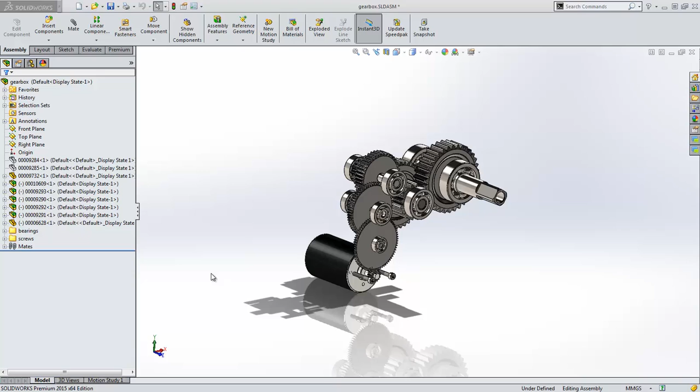The new View Selector gives you the ability to easily manipulate the view. Previews are also available, even if the view plane is obscured.

Hidden components can now be previewed from the Feature Manager without having to unhide unnecessarily.

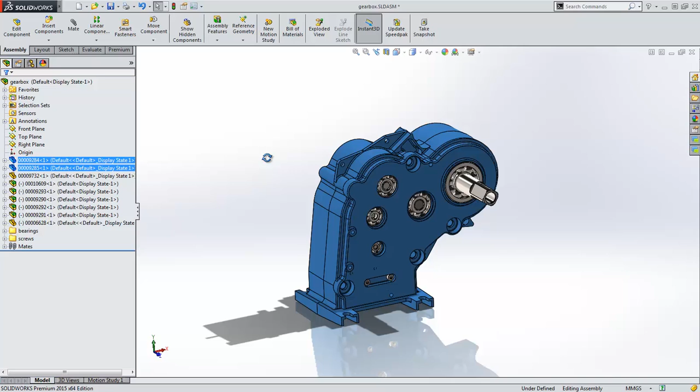Isolating components is also improved in SolidWorks 2015. You can now isolate a component whilst editing it, and also isolate components from a common mate. In this case, we will isolate these two cast components and create a display state.

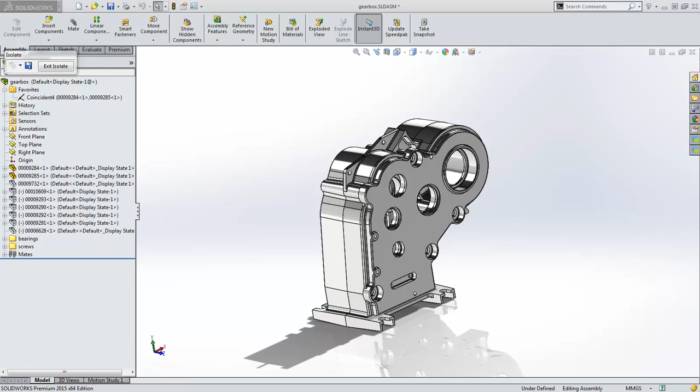In SolidWorks 2014, as new components were added to this assembly, they would, by default, be added to this display state. To preserve this display state, you can now choose the option to automatically exclude new components.

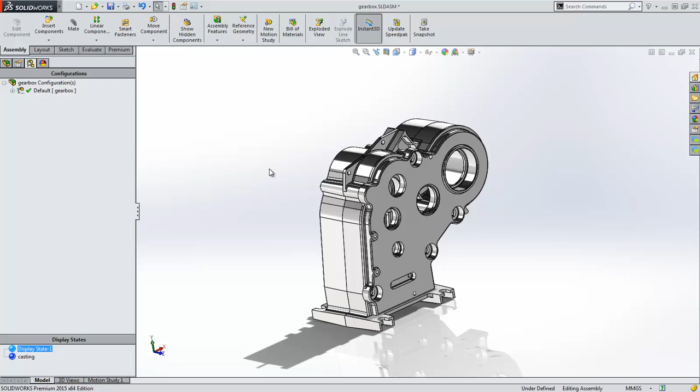At a component level, SolidWorks 2015 gives you the ability to track parent and child references using a great new graphical reference viewer. Embedded references, like sketches, are listed next to the reference arrow.

SolidWorks 2015 enhances the selection process in several ways. A new toolbar is available from the right mouse button and gives you the most commonly used commands. In this case, we will filter to faces and select some geometry.

Very often you may accidentally unselect before completing your task. We now have the ability to go back to that previous selection, saving us wasted time and effort.

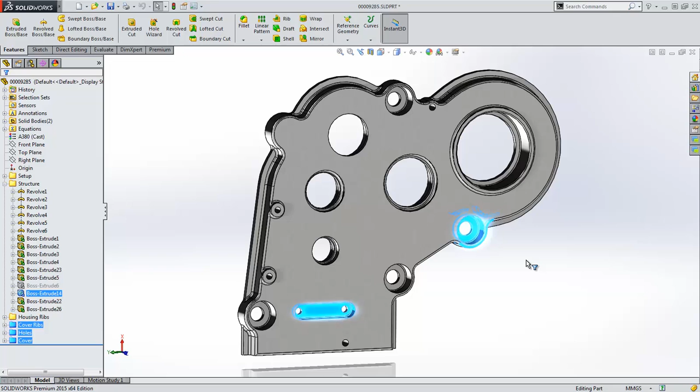Hard to pick entities like small surfaces are also much easier to deal with in SolidWorks 2015. Repeated small mouse movements now change the selection filter to faces, reducing the need to continually zoom in and out.

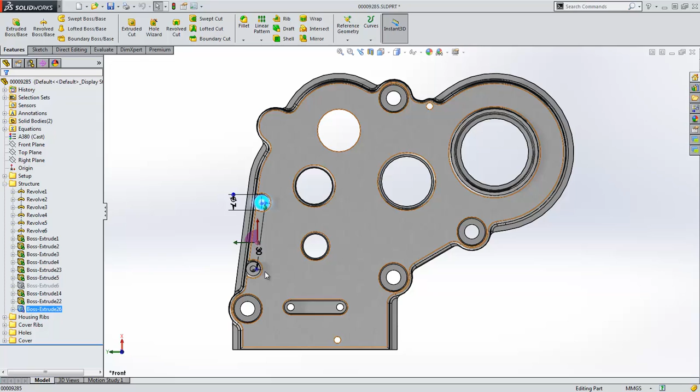Selection sets also allow you to store important geometry or components in a selection folder for later use in design or simulation.

You can now customize the fade-in toolbars in either the Feature Manager or the Graphics area. In this example, I will add a Hole Wizard command to the toolbar.

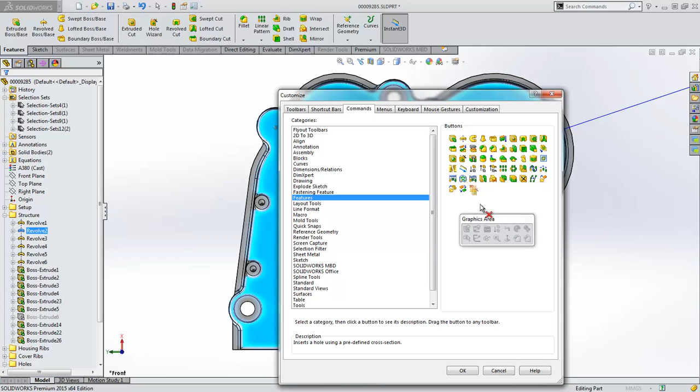I can now quickly select a face and place a standard hole very quickly and easily.

Finally, Toolbox is now improved to include the option to allow custom configuration names. We can also change the way that components are shown in the Feature Manager or reported in a bill of materials. Let's change this to show the file name in the Feature Manager and the configuration name in the bill of material.

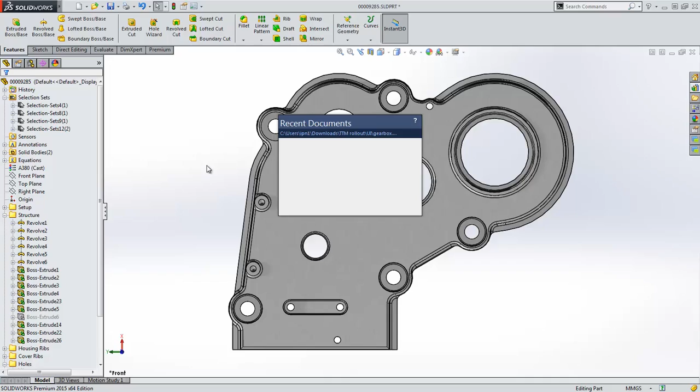I can now place a standard M6 bolt from the toolbox in the holes around the casing.

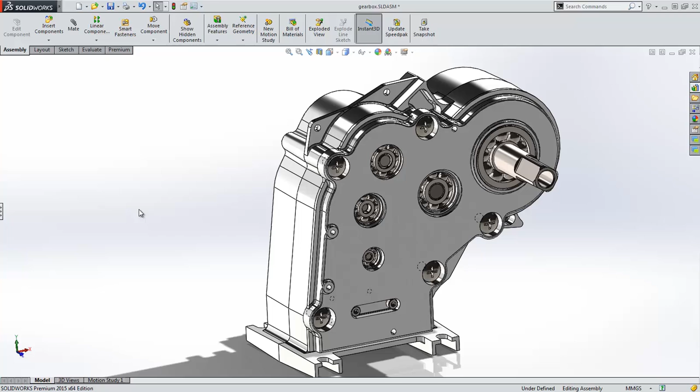We can now see that the file names are shown in the Feature Manager, and if we generate a bill of materials, we can see that this reports the components as the configuration name.

SolidWorks 2015 dramatically improves the user experience and makes everyday tasks faster and easier.